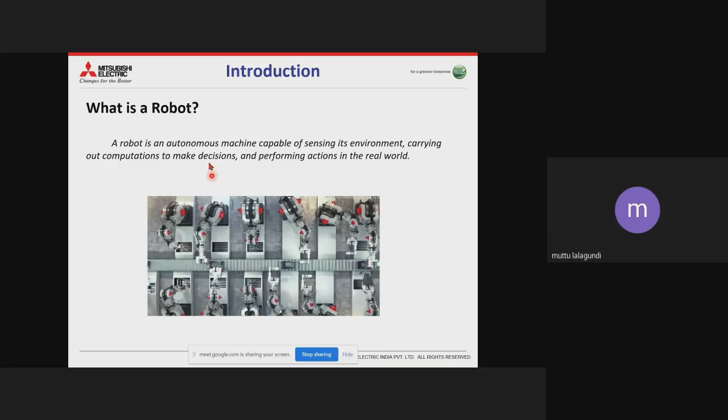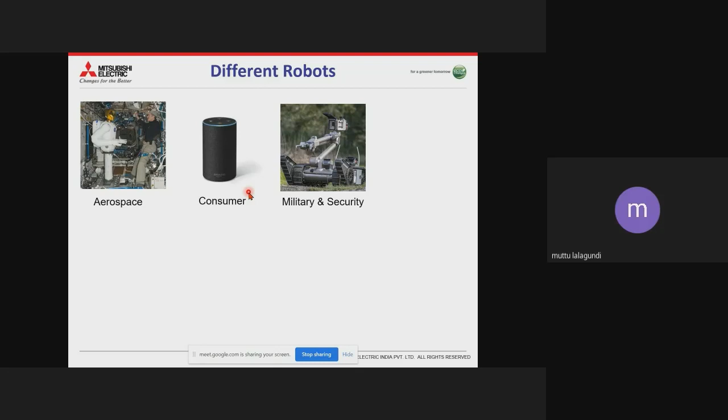Now, different robots - here we will understand. Some robots are used in aerospace, which are compatible for such kind of environments, so aerospace robots. Then consumer type robots. Then military and security purpose robots, where humans cannot go sometimes. Then drones, also a kind of robot. Then research applications also use robots - such robots have different features and specifications.

Then exoskeletons, which can work with a human - for example you can look at the picture here. So such kind of robots also exist. Then humanoids, a kind of human-like robot. They are used in many industries and household applications like hospitality and other things in hotels, so most of the cases they are used with the humans - humanoids.

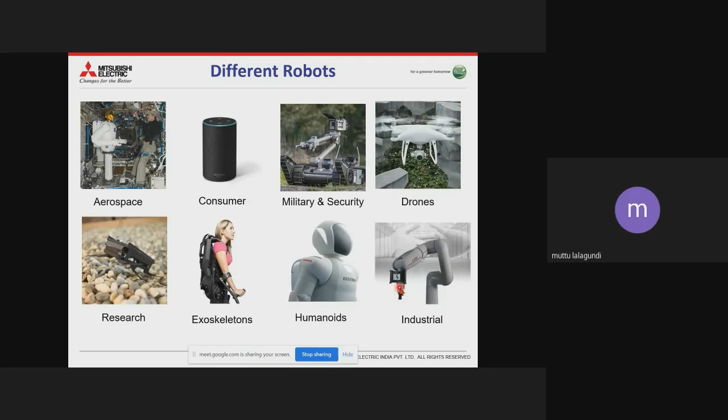Then comes robots used in the industry. There are a lot of applications, a lot of types, where these kinds of industrial robots are used for different kinds of works in the industry.

There are majorly four types of industrial robots. If you categorize industrial robots, there are articulated robots - in that there is vertical and horizontal. Horizontal robots are generally called SCARA robots. Then the second one is Cartesian robots - these robots use XYZ Cartesian forms, or Cartesian joints, for the linear movement. So these are called Cartesian robots.

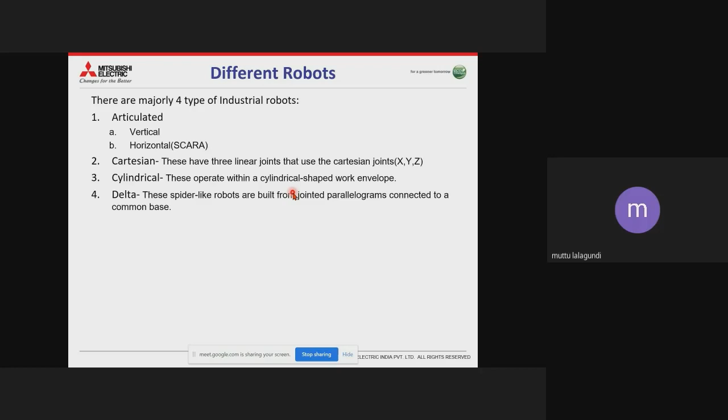Then there are cylindrical type robots also, which operate within a cylindrical shape to work. Then Delta - Delta is a kind of robot which is built from jointed parallelograms connected to a common base.

These are major types, and you can see the same robots here. So this is a Cartesian robot. It uses X movement like this, and Y movement like this, and up and down, just Z format - X, Y, Z. So linear movement totally.

Then articulated robot, there is a vertical and horizontal also, which is installed on a horizontal base here. So this is, whereas the horizontal robot will move around a vertical stand. So this is a vertical base, you can say, and around this it will move like this. So that is horizontal, also called a SCARA robot.

Horizontal robots are also called SCARA robots. Then this is cylindrical robot. It is provided with a cylindrical space for the movement. So here is a kind of arm, left and right it will move, and it is also having a feature of moving up and down also. So this is cylindrical.

Here this is a Delta robot. It looks like a spider. Parallelograms are used for this purpose. So this is the hand or the tool, you can say. A lot of different applications are done using delta robots. In most cases in industry, these types of robots are used: vertical robots, horizontal, and delta. Most cases they are used.

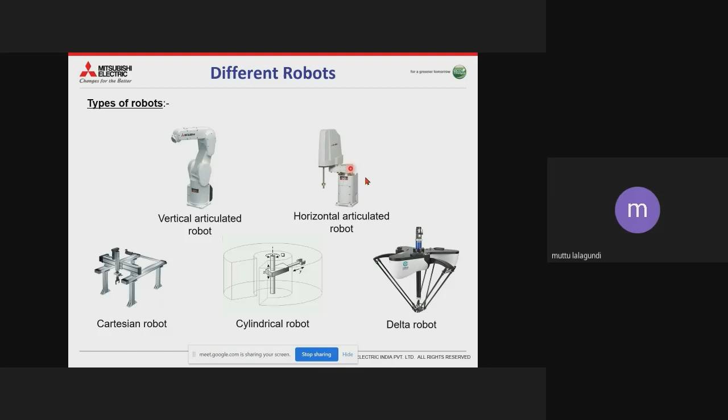Then why do we have to go for robots? What are the advantages of industrial robots? You can see there is a hazardous space sometimes where humans cannot enter for working there. So in such locations, robots can easily work. So for that, we use robots in hazardous work environments.

Repetitive work cycle means a human can make some error. Every time if you ask some person to take some part and keep it in another place, consistency or repetition will not be stable all the time. But whereas the robot, if you use a repetitive work cycle, every time it will do the same job you are asking it to do, whatever the program is. Then consistency and accuracy - definitely we will get accuracy, whatever job you are telling, the same job it will do, with precision and consistent performance.

Difficult handling tasks for humans, maybe in hazardous areas like high temperature areas, or chemical areas, sometimes it is very difficult to handle the job or application for humans. In multi-shift operations, a human can work maximum one shift, maybe 8 hours. But whereas robots you can use 24 by 7, with proper maintenance. Maintenance is required, but in multiple shift operations, more than what a human can work, they will work.

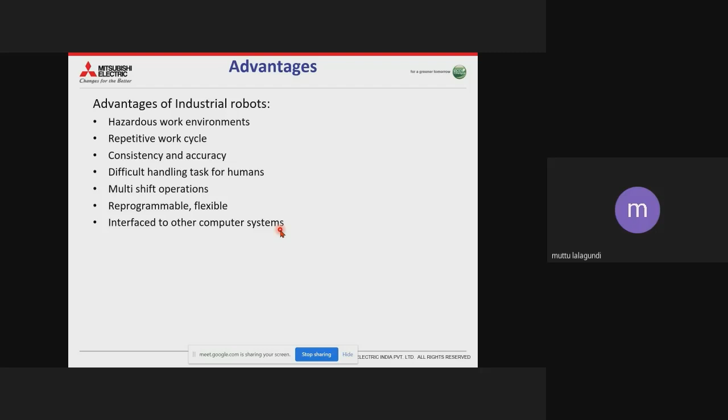An application, this is an important part - why we have to use robots in industry, or requirements, you can say. So in industry, for example automobile and machine shops, if you take, there are many applications. Deburring and polishing applications, you can say. So programming is always the same for the robot, only the tool used makes the application dependent.

Here there is a deburring or polishing tool used. And here it is a tool used, and it is taking the job here, and using it for the polishing purpose here. Such applications also we can do. Then appearance inspection - let us say size or dimension is important in our applications.

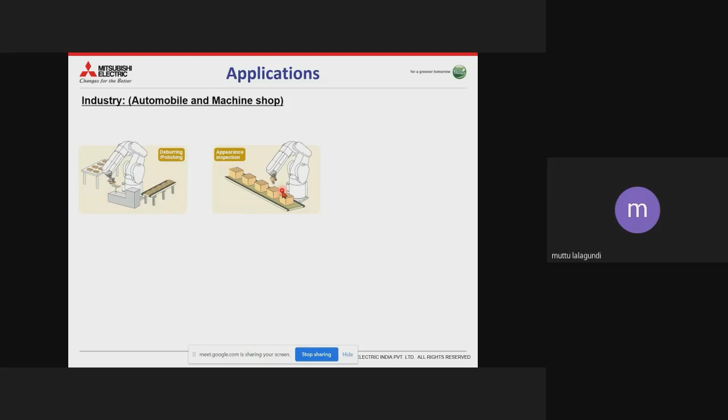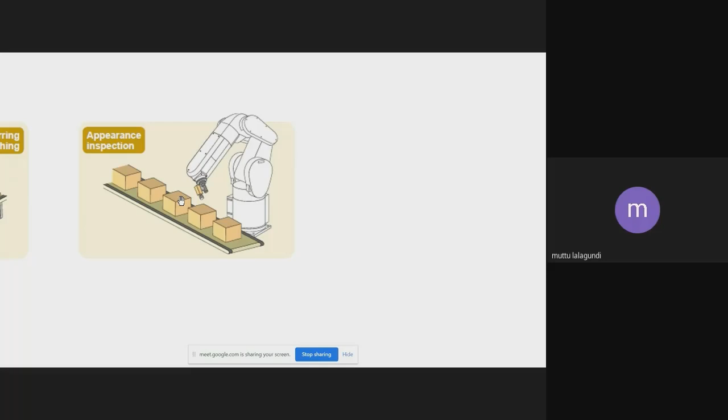For testing dimensions and weight, and other purposes, we use a camera. The camera is connected and it inspects all the devices, for example in this application. Such applications can also be used for appearance inspection purposes.

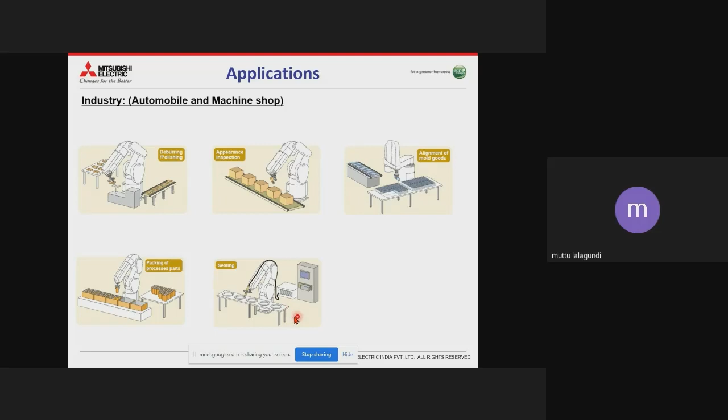There is a next option for food and beverage industries, where there are sealing applications of different types used in the industries. Sealing is also a common process - you can seal any of your goods using some sealing material, and the robot will help seal that part.

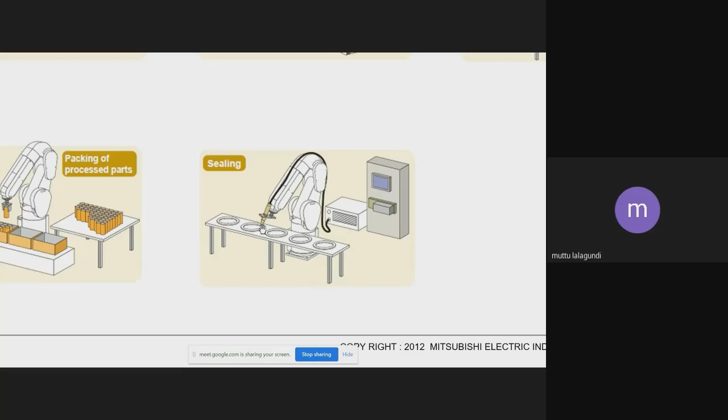Other part of sealing is applying sealants - a liquid. There is a sealant or liquid dispenser connected to the robot, which will equally distribute the liquid, and any part can be installed and sealed here. This is used in food packaging industries as well - we can use sealing applications with robots.

Then assembly of automobile components - you can see an automobile component part of an engine, which is assembled by the robots. It is programmed so that it will pick some parts available around the robot and assemble them, giving us accuracy and fast operations with the required precision.

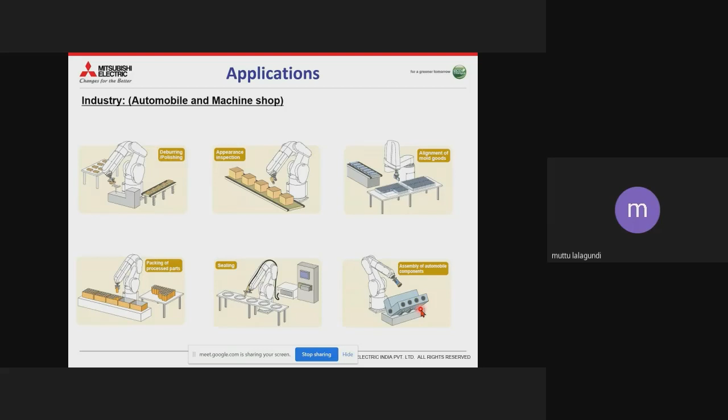Then in the electrical and electronic industry, robot applications here. Again, whatever the electronic or electrical parts are, they will be inspected for appearance by looking, using 2D or 3D cameras with the robots for inspection of these parts.

Then there are applications where screw tightening, or screw fastening, is required. In such applications also the robots are used.

Then other applications like soldering and welding - such applications are also used for any kind of electronic goods. Maybe soldering is required, in which case the robot will handle such applications. It needs to be programmed in that way.

Laser marking also - whenever you want to do some cutting operations, laser marking or cutting is required. A laser tool is connected to the robot arm, and it will mark using this tool while the robot helps carry the tool, programmed for such applications.

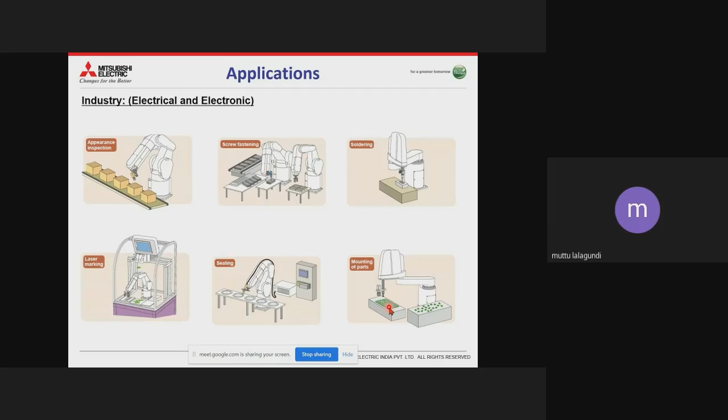Then if you take food products applications, there is packaging, as mentioned in the previous slide also. Packaging is a very important industry type. Let me explain why - daily based goods, from morning to evening, include food products or packaging liquids we use, and water bottles. All these products have to be packed, and precision is also required.

If you take a water bottle, and test 100 water bottles of 1 liter, you will not get any difference - the content will be 1 liter. How is this achieved? Only with robots, because whatever liquid you want to pour into the bottle, that much precise quantity it will pour and pack. The bottle is then kept in the box, making the packing application.

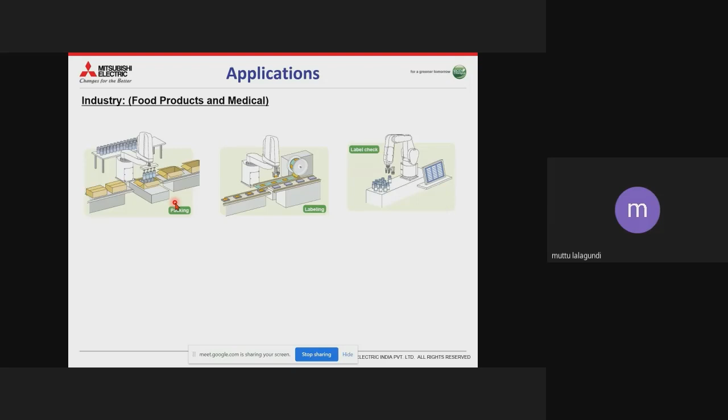And label check also, whether labeling is done or not. It's again an inspection application here. So again, with the help of a camera, it will do the label check. Loading of parts to a medicine analyzer. Okay, so it's a kind of medical industry here, a medical type of machine, you can say. So it is loading and unloading the parts after analysis by the machine. Such applications.

Then sorting applications also. So I'll show you some videos on this also. So based on the color, based on the dimension. Okay, so if you mixed any of your goods and parts, it will sort them depending on the size, dimensions. Okay, with the help of again a camera here.

Loading unloading process for filler applications. So filler application, it's a kind of liquid filling, or as I mentioned, kind of water filling also, right? So it's the same application again. Only here the part will change. That is a gripper, you can call it, or actuator, you can call it. So that part will change, but robot applications and programming are almost similar in loading and unloading or the filling process.

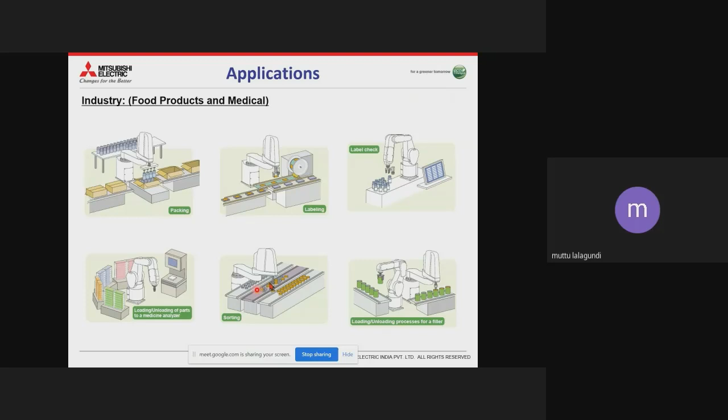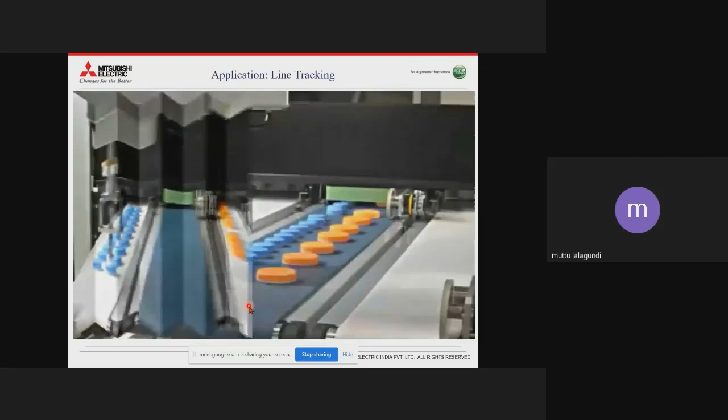Okay, this is just one example for the sorting, as I mentioned. Just have a look. There is no audio for this. Okay, so what it is doing, it is sorting the parts here, and exactly it is keeping them in desired positions. Okay, so if you mix the different parts, it is categorizing or sorting the different parts here.

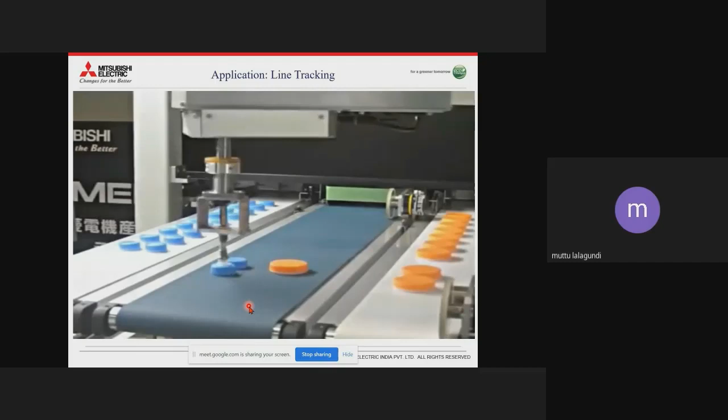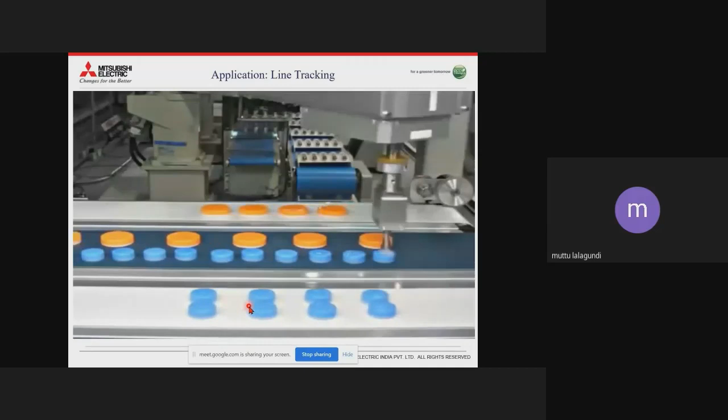Okay, this is called a line tracking application. I hope the video is visible. Okay, maybe some lagging if it is there in the network. So such applications are done in the industry in most of the applications. This is a kind of pick and place application where line tracking is required as well.

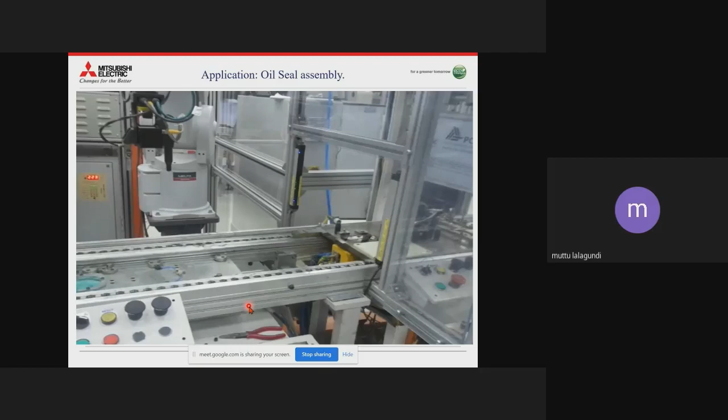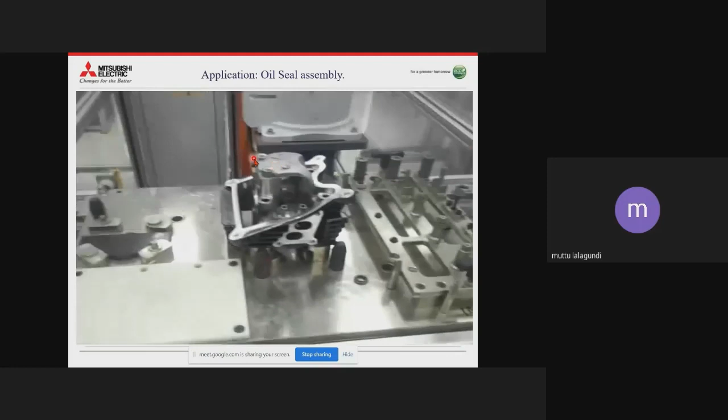Then there is an application, oil seal assembly here. Okay, so there is a mechanical or assembly part here. So it is keeping some oil seals here. Okay, so assembly it is doing. You can have a look. So this is a part here, right? And there is an oil seal applied here. So first it will apply the sealant. Okay, and screw application it is also doing. You can see screw tightening it is also doing.

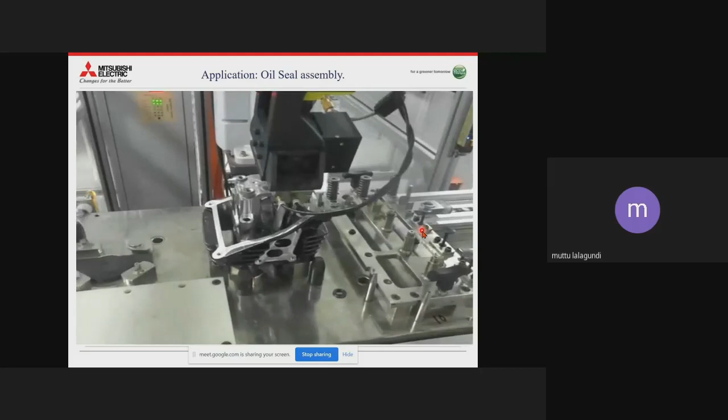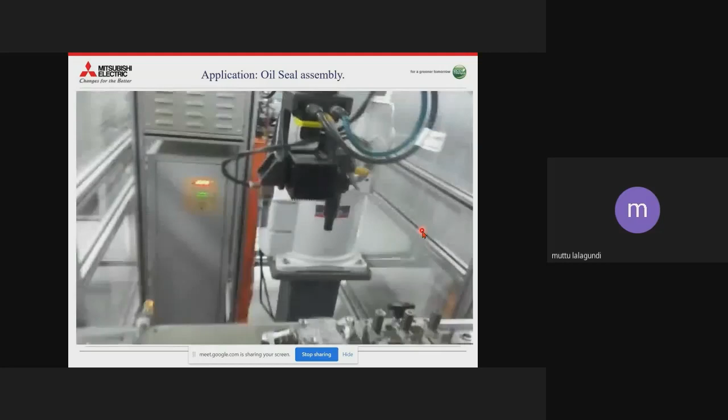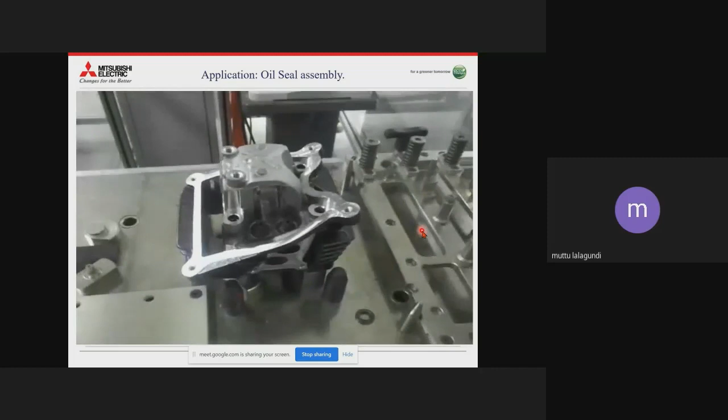So this is a vertical robot. It's doing an oil seal assembly here, right?

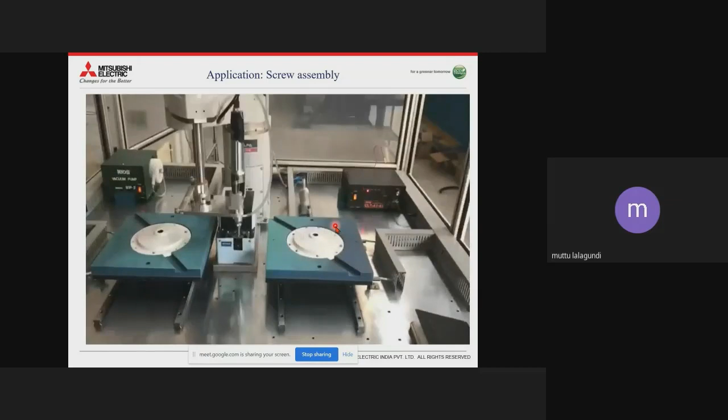So these are the applications. Then we have to understand how exactly in industry the robots are used. Not only a single robot is directly applied; it is used with all other factory automation products and components, you can say. So here this is one configuration, or one structure, or you can say a machine assembly test.

Okay, so why is HMI used in industry? Every time we want to give some inputs to the PLC or to the robots or to other devices, we can input through the HMI. So if you want to correlate this, it is exactly like ATM machines, where you give inputs like the amount required, password and other things. Such inputs we are giving to the industrial PLC here using HMI.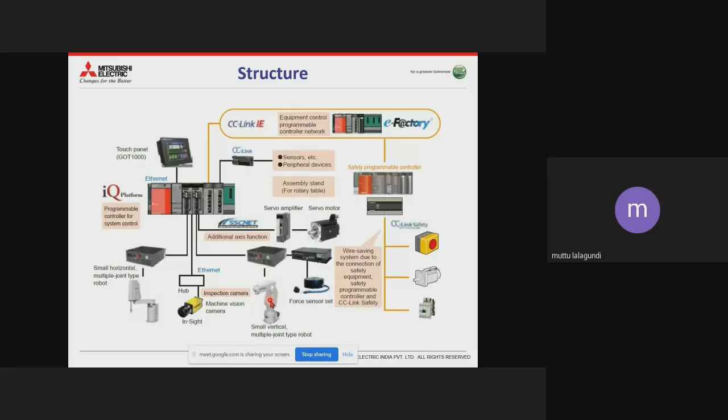And of course servos are also used in most of the cases for these applications. And inside the robot also there is a servo system. So this is the complete structure, an example of robots with other factory automation products.

Then safety is also important here. So one more point is also there. Why is safety important? Safety not only for the robot; safety in industry is very important, because there are a lot of people working individually towards their job there. But if any machine, robot or application is not working properly, not doing its job correctly, then that will lead to some accidents.

If it is not following the proper programmed path, that creates hazards or errors, and then it will lead to an accident. That's why safety is important. From the equipment point of view, it will prevent accidents and save the cost of the equipment, the machine or the robot. And it will save the operators and other humans working there. So accidents should be avoided, and for that we should use safety.

So the operator operation area and robot operation area are separated from each other with a monitoring plane for safety. In robots we can set some safety planes, and we can use safety curtains and safety devices to separate the robot operation area from the operator working with the robot. So the operator and the robot access the shared operation area alternately, allowing for cooperative or collaborative operation.

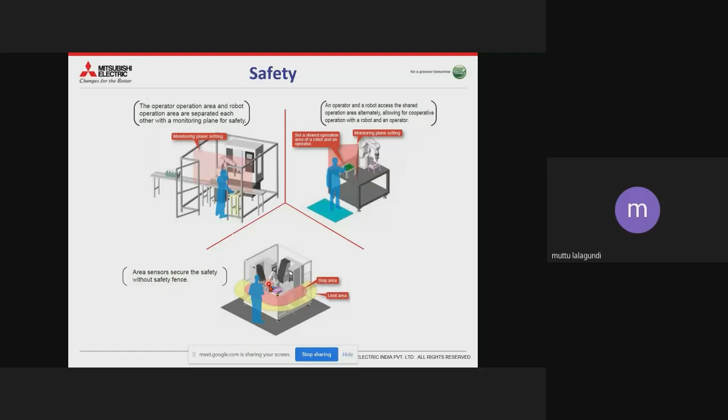Whatever hazards, errors or accidents happen, they happen whenever a human is involved in some actions with the robot. That may be during robot programming or during installation. Or if the power supply and other things are supplied uncontrollably, only in that case can the robot cause accidents. So we should follow safety. For safety, I have added a few more pieces of information; I'll give them in the next slides.

So this is the general information we discussed about robots and robotics. Now there are Mitsubishi robots, their types and how we categorize them. That we also need to understand. There are different models available, like RV-2FR, 2FRL, RV-7, 13 and 20.

If you read its nomenclature or model name, you will understand why it is written like this. I'm going to tell you for what purpose the 2 is written. The 2 is for its payload. Payload is nothing but the amount of weight the robot can carry. So it is 3 kg here, 4 means 4 kg, 7 kg, 13 kg and 20 kg likewise. So this is the payload, or maximum load capacity.

Then there is one more term, that is maximum radius. What is maximum radius? This is the robot base. When you stretch the robot completely, like this, that is the maximum reach where the robot can touch or move. That is standard for each model. Whatever model we take depends on our product selection. In that also there is a standard model.

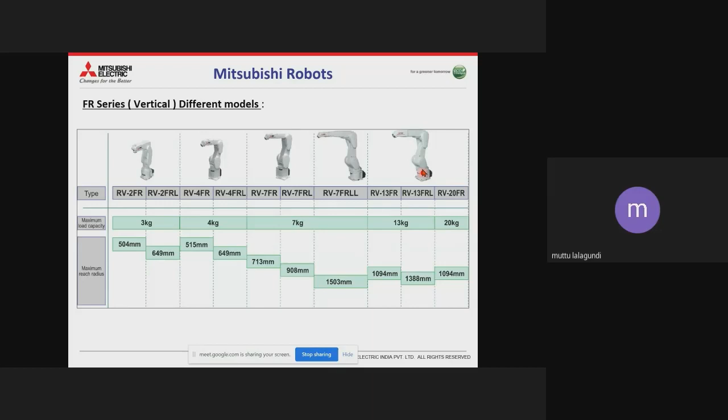For example, 2FR. L indicates a longer arm. Standard is 504 millimeters, and if you take 2FRL, for example, just for information, it is 649 millimeters. In the 7 kg range we also have different models, in 4 kg and 13 also, likewise. These are vertical type robots. You can see the structure. If you look at the robot, it is a vertical type robot.

Yeah, this is, if you take RV-4FR, RV-4FRL, and with that there is a complete name also. For example, if this is the code, how we can understand or how we have to read it. So RV here indicates vertical. It indicates vertical multi-joint arm. So the robot is vertical type.

It indicates here. The next part is the payload. Payload means, I already mentioned, 4 kg, 7 kg. The number mentioned indicates its maximum load carrying capacity. The next is here: FR is a series. So there is F series and FR series in Mitsubishi.

And J here indicates axis configuration. In the standard case, J will not be there. Standard means it has 6 joints or 6 axes in the robot. For easy understanding, vertical means always 6 axes. But there are some robots, 5-axis type robots, also available. So if you want to have 5 axes, it is indicated with J.

Then L. L indicates the arm length here. There is a standard arm length; in that case, L is not there. If L is mentioned, or sometimes double L, it is a longer arm than the standard. Standard means blank will be there. If you want a longer arm, L or double L is there.

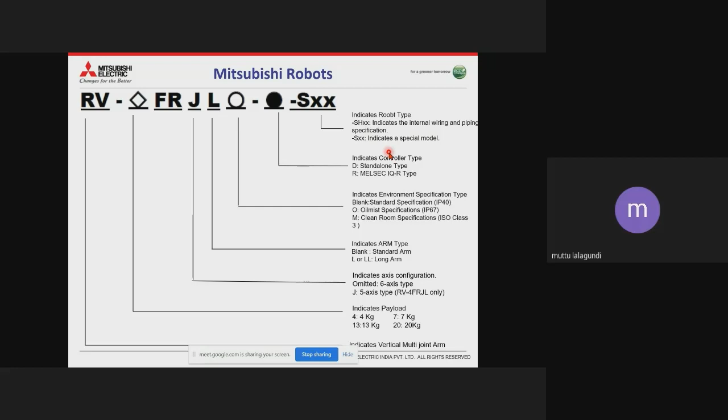Then other specifications. Internally the robot has some wiring and piping also, because if you want to use a gripper with pneumatic applications, with air, then the piping specification depends on how you want to use it: externally or internally, whether the user wants to create it or wants it from the manufacturer. So those are special indications, and other special models are also available. That is indicated here in the last part.

If SH01 is written, this is the meaning, and likewise up to SH05. What it indicates is hand input. Hand input means some sensors are used, proximity switches, to understand whether there is material or not in a gripper. So it's the wiring and piping, you can say its dimensions.

In some cases piping is not available. With those specifications we can get these wiring and piping types, its condition. So that is also selectable. We can do that while purchasing the robot or at model selection time.

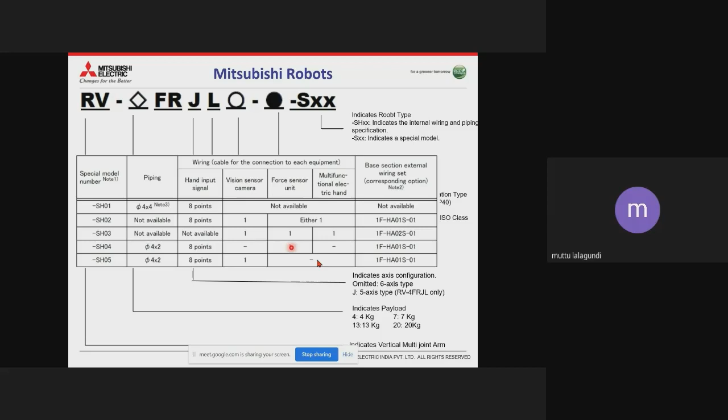Yeah, I mentioned the controller again, right? So this is the controller model. Every product, the robot arm, has some nomenclature, and the robot controller also has some nomenclature. You can see this is the robot arm, and this is the controller used with it.

At the end, D is mentioned. For your simple information, if D is mentioned last, it means it is a standalone type robot arm, and with that the CR800-D standalone controller is used. D means it has to match: standalone arm and standalone controller. There are other specifications also; when you go in depth, you'll understand.

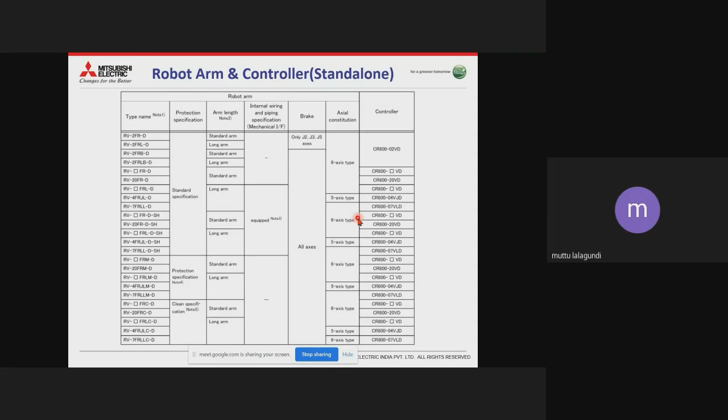And if R is mentioned, the controller type is Melsec iQ-R. What is Melsec iQ-R? For your information, Melsec iQ-R is a PLC type in Mitsubishi. So with the robot controller, a PLC is also used. In that case, R is mentioned at the end for the arm, and for the controller also R is mentioned at the end. So R means it is Melsec iQ-R type.

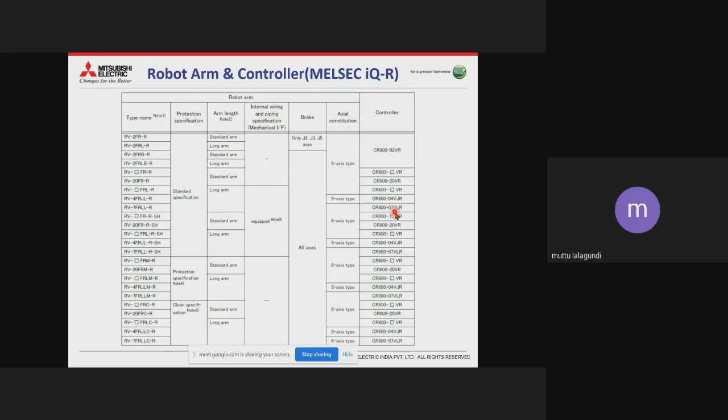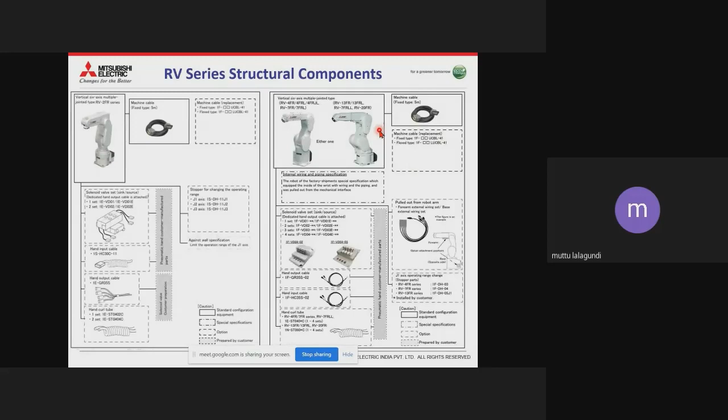Okay, then again the basic parts, we have to understand the anatomy also. So why there are vertical type robots, why there are horizontal type robots, and how exactly we call horizontal, vertical, delta. Okay, so it is based on its anatomy and its structure, and the number of axes used, as I mentioned. So in the picture, what you can see, it is a vertical robot first thing, and that is indicated using RV.

And in general, all these vertical robots are having 6 axes or 6 joints, you can call it. So not only Mitsubishi, it is common information. Vertical robot means 6 axes. So where are these 6 axes? This is joint one or axis one, you can call it. So the whole body will move like this on this vertical pedestal here. This is joint 1, and there is a joint 2 or axis 2 here. It will move up and down.

Same is here, axis 3. It will also move up and down. And this is J4 or joint 4 or axis 4. So this will move clockwise, anti-clockwise like this. And up and down, joint 5 again here. And there is joint 6 where your gripper or any pneumatic device or moving parts we should connect here. It is the 6th joint. It will move clockwise, anti-clockwise, right?

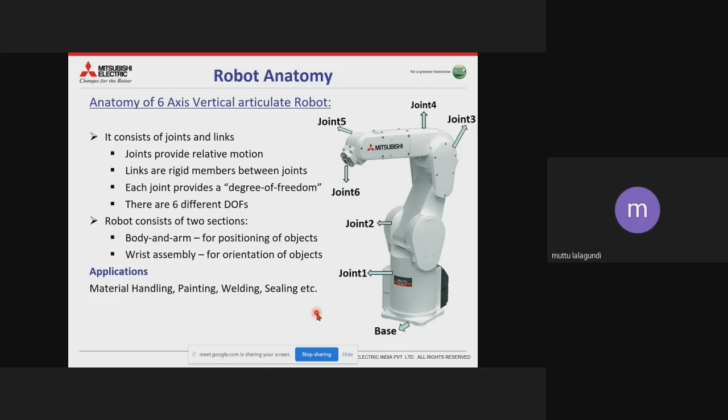So these robots are generally used in applications like material handling and painting. We have seen a lot of applications in the beginning, right? So applications like painting, welding, sealing, these are used. And robot anatomy, the 6 axis or 6 joint robot will move horizontally like this. So if you stretch this completely, and backward also, and vertically also. So the maximum movement a robot can do is called the workspace. This is the workspace.

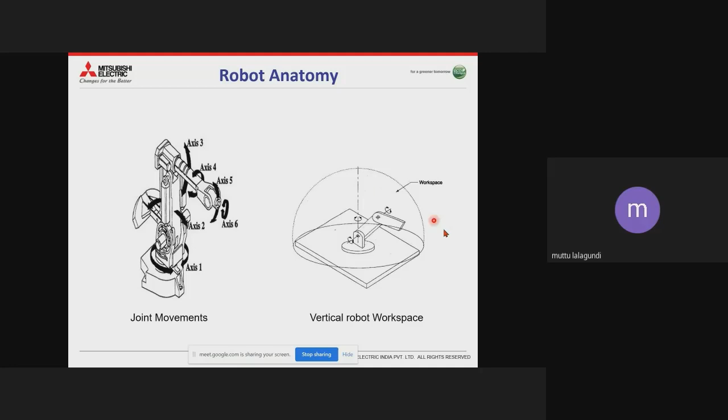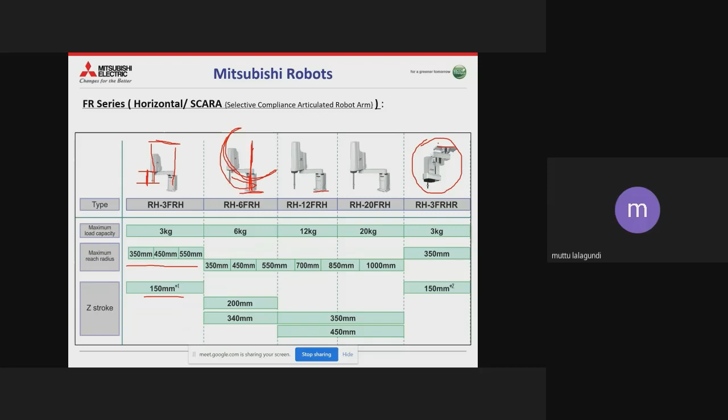Generally the SCARA robot or horizontal robot has 4 axes only. Where are the 4 axes? This is one joint; using this joint it will move clockwise, anti-clockwise. The next part here will also move clockwise, anti-clockwise. This is joint 1, this is joint 2, and joint 3 is this spindle. The spindle will move up and down, and it will also rotate clockwise, anti-clockwise. This is joint 4. So generally SCARA robots have 4 axes or 4 joints.

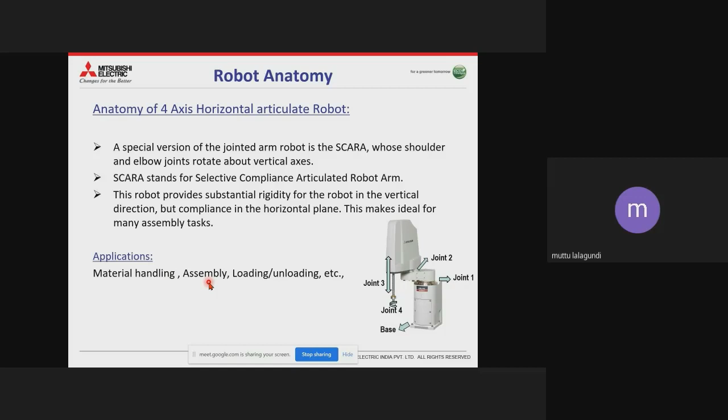In most cases it is used in material handling, assembly, loading, unloading applications. In this robot anatomy, you can see the workspace, how much it will rotate, and up and down only this spindle will move, not like vertical. That is why in 3D space, for any kind of jobs, vertical type robots are more convenient than horizontal. But pick and place applications, like picking from here and keeping here, are very compatible with SCARA or 4-axis robots.

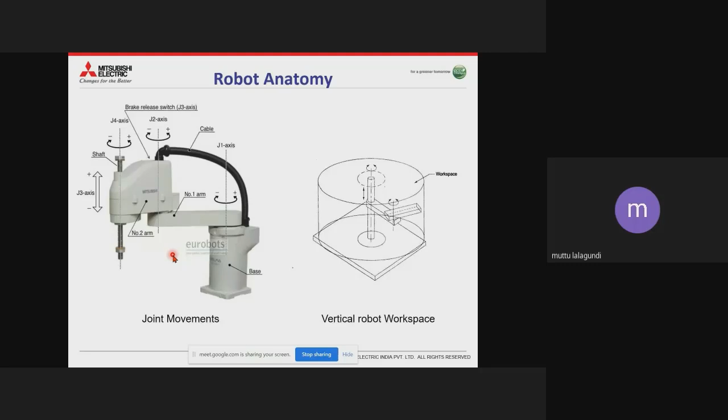Next, robots generally need to be taught. What is teaching? You want the robot to go some place, so how do we move it? There is a teaching box; it can move in Cartesian format, XYZ movement, where the whole robot moves in that direction, or otherwise each joint moves. This operation is called jogging. Using jogging with the teach pendant, we can save the positions where you want the robot to go.

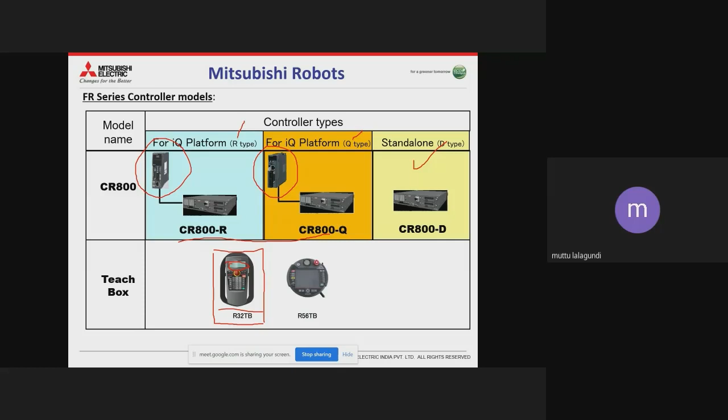So before programming, we have to store the positions. We have to move the robot using this teaching pendant. This is also teaching pendant only, so what is the difference? This one has an LCD panel with some keys over here.

Whereas this one is a touch screen. It is a higher end teaching pendant, having some buttons also. These are used for the robot jogging operation, and it has emergency stop. Emergency means, as the word indicates, we can stop the robot immediately. So for operating the robot, a teaching pendant or teaching box is used.

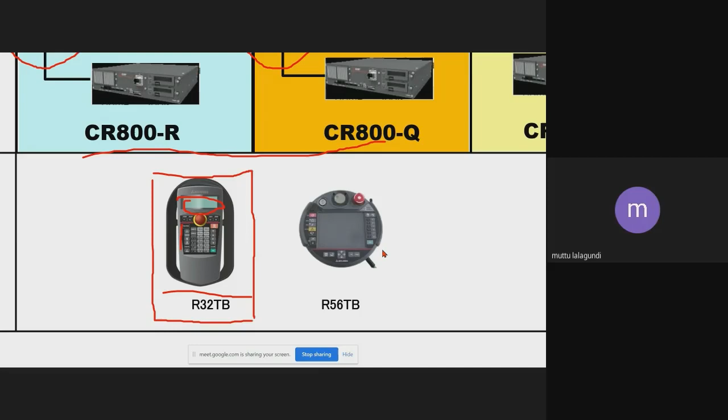Now in general about the robot, how it works, how it moves, and what exactly they use - that movement is governed by the coordinate system inside, the robot coordinate system. As you already have information on that, the same coordinate systems the robot also uses here.

So a coordinate system defines a plane or a space by axes from a fixed point called the origin. This term 'origin' has a bigger meaning. Origin is the home position, for example - it's not exactly home. If you operate the robot, you will understand the difference between homing position and origin. Origin is set when you get the new robot to your shop floor.

It is not set with its origin, meaning what are its limits, to what degree each joint can move. So that setting we have to do - from what is its start position or origin position, from where to where it has to move. So that is called origin.

It has some different methods also. Origin setting is a method we have to do for new robots, and whenever it loses its origin settings also. In what conditions does this generally happen? It has some batteries, so if the battery voltage level goes down beyond the permissible level, in that case we have to do origin settings.

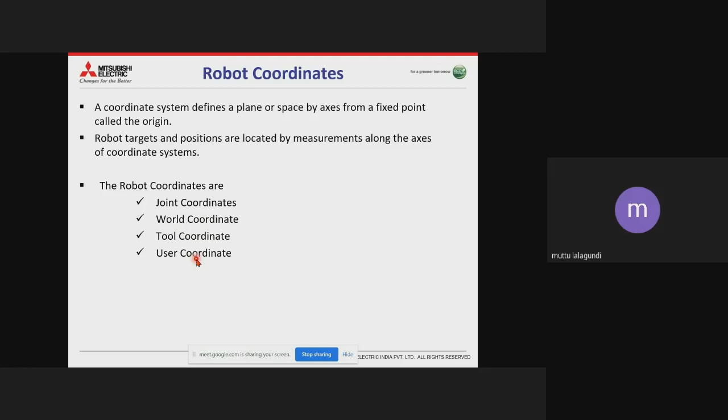Then user coordinate - the user or operator can set any direction. If I want to change X to Y or Y to Z, I can make that change. So that is user defined coordinates.

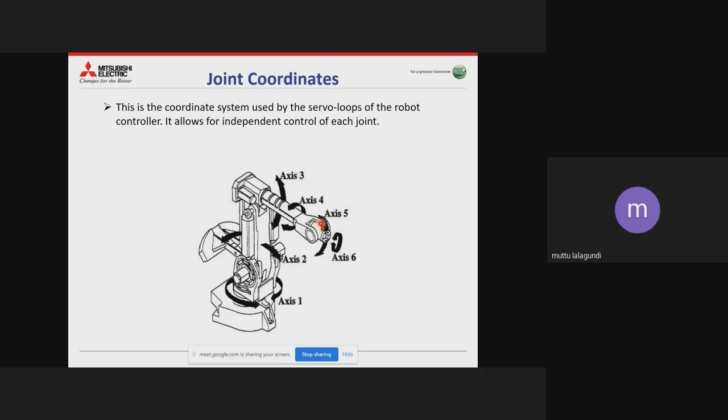This is joint coordinates. As I mentioned, independently there are 6 axes or joints. Independently they move irrespective of other axes' movement or position. This is world coordinate system.

So what is that? It uses Cartesian coordinates x, y, z. For example, this is x, this is y, and this is z. So what happens if you want to move in the x plus direction? The complete robot will move in this direction. X minus, this direction. Y, this way, the complete robot will move. In this one, J1, J2, whatever axes need to be used, all these axes or joints together make a movement.

That is world coordinates. And world coordinate means this is the base - from the base it will always take the reference of x, y, and z.

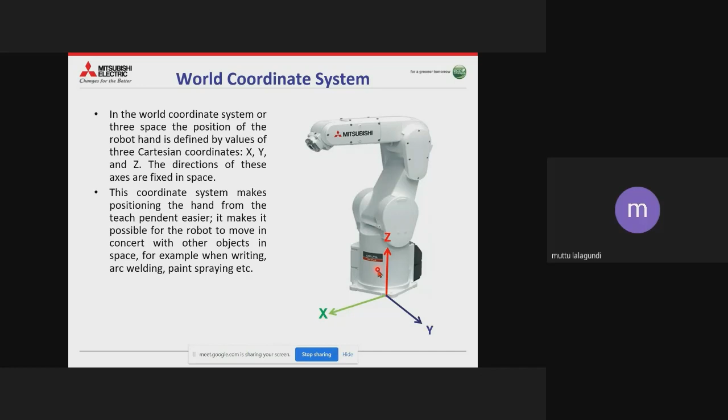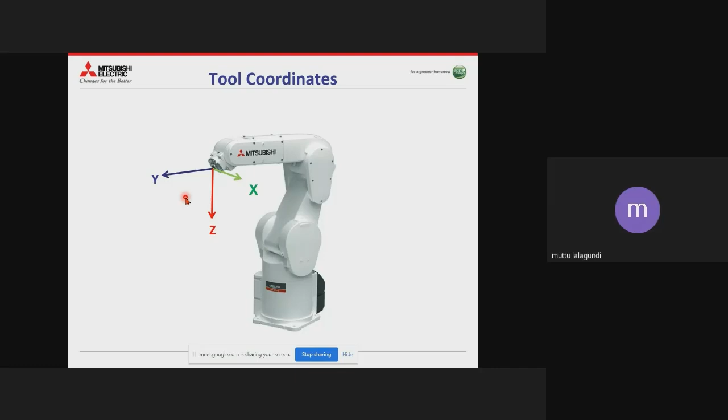Whereas in tool coordinate system, this tool coordinate again uses x, y, z only, but the reference is not from its base, the robot base. It's from the tool. Tool is any gripper, as I mentioned, any gripper or pick and place tool used to hold the object. This tool is connected on the J6 axis. So with respect to this tool, its x, y, z direction, it will make the movement. So in reference of the tool only it will move. This is tool coordinate. It also uses x, y, z.

So user coordinates, as I mentioned, this is generally set. If I want to make it x or y, I can make it. That's why it's called user defined coordinates. So these are the coordinate systems or the moving methods used in the robot. This is in general, not only Mitsubishi. Every system uses this.

Then there are some robot general terminologies we need to understand. Reach is, as I mentioned, there is an arm length also, L and double L, we heard that, right? Reach means the maximum horizontal distance from the center of the robot base to the end of its wrist. End of the wrist means exactly from here, this is the center. From this center, if you stretch the robot like this, till this end.

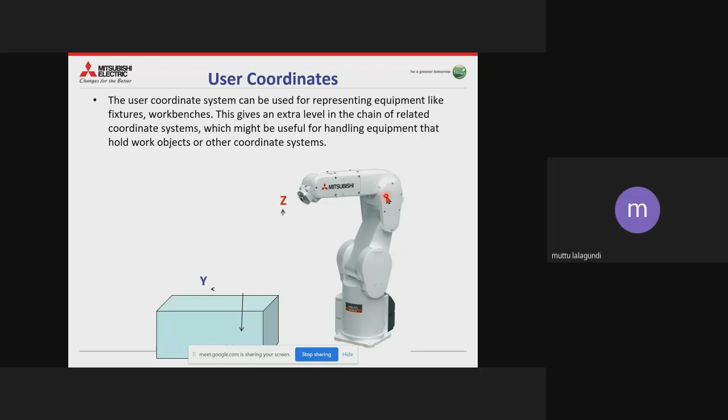So from this end to this end, it is called the reach. Then maximum speed, as you know, it is not having a fixed speed, because there are some servo motors as I mentioned here. There is a heavy motor, a small motor, and even smaller, and they have different speeds. So your robot's maximum speed is a cumulative speed, including all the other axis or joint speeds.

And at full speed, the maximum speed is a theoretical value which doesn't consider loading conditions. This is ideal. If you consider the load, the speed will reduce definitely, because it should maintain accuracy also. It has to properly pick the part and place it at the desired position, that should happen properly. So at the speed where you are able to get accuracy, that maximum speed is called maximum speed.

It's a cumulative speed. Payload is simply, as I mentioned, 4 means that the robot is capable of carrying 4 kg load. That includes the ideal 4 kg. But if you connect any tool or gripper, any other device to the robot, and also your workpiece, including that also it is 4 kg, for example. That will be the maximum payload.

Accuracy, as I already mentioned, while carrying maximum payload and while having maximum speed, it should produce proper accuracy, meaning correct position. Accuracy means the robot reaches the correct position where you want it to go, with high speed and carrying its maximum load. This is called accuracy. And the same accuracy every cycle is called repeatability.

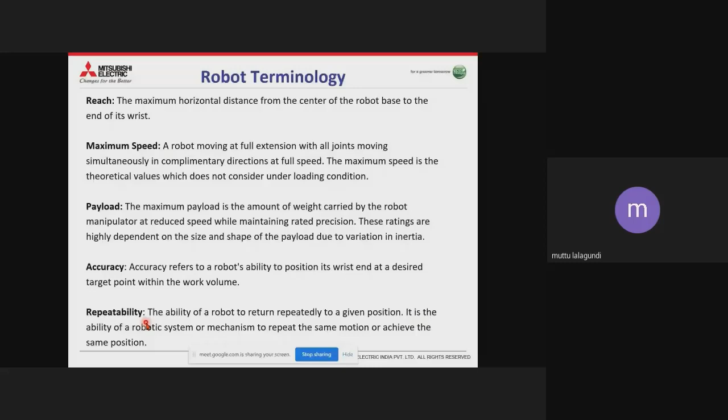Then there is resolution also. For your understanding, let us say you want to move a robot from one position to another. What is the smallest distance it can move? Let us say 1 millimeter or 5 millimeters, only that much it is able to move. That is the resolution, the smallest position or motion or movement it can do. That is called resolution.

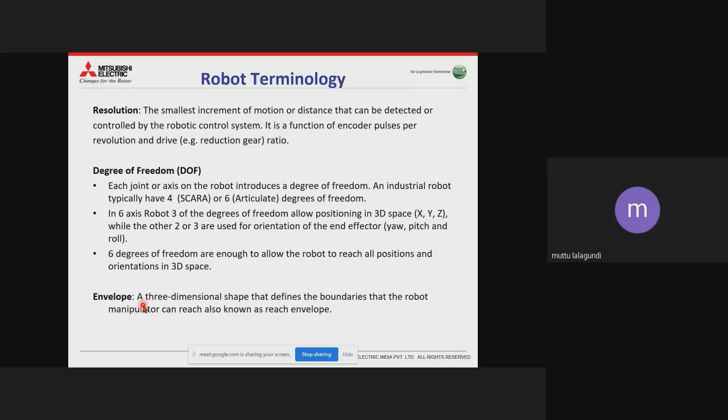So we already understood degree of freedom, each joint independently moving is degree of freedom. Envelope means whatever the robot's working area is, that is called envelope. That is a three-dimensional shape or area.

Then, while understanding a lot of applications, we mentioned about vision cameras. Cameras are very important if you want to achieve accuracy and precision, and if you want to achieve maximum speed with robot applications, cameras are most of the times used. In general, there are 2D cameras and 3D cameras. So why is it used? Backend image processing hardware and software - the camera at the front end captures images from the environment or from a focused object and then sends them to a processing system. Depending on the design or need of the MVS, the captured images are either stored or processed accordingly.

So it will take the image and send it to a robot controller or a PLC separately. It will process there and give the command to the robot on what it has to do.

There are 2D cameras and 3D cameras. A 2D vision system acquires the target object image effectively as a flat two-dimensional plan view, for example like this. So it uses X and Y. Z is not there, as it is 2D only.

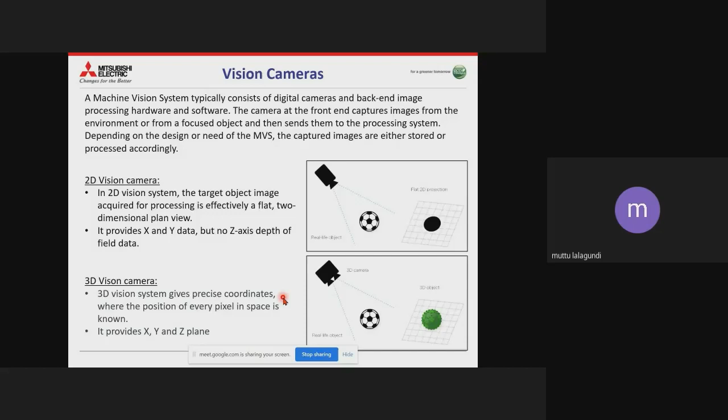And with that, if you want to check in one tablet or capsule that there are, say, 10 tablets, if it is produced properly, whether the weight, quantity or number is correct in that capsule, you can use a camera in that case. It will immediately scan whatever capsules are present and give the command for the next processing step. If it is okay, it passes to the next step; if not, it will discard that product. So cameras are applied with the robot like that.

There are different vision cameras also. If you take the 2D sensor, these are also called sensors, in easy terms used in industry. So these are called vision sensors. VS80, 70 and 20, and likewise models are there, and different models can be used based on our requirement.

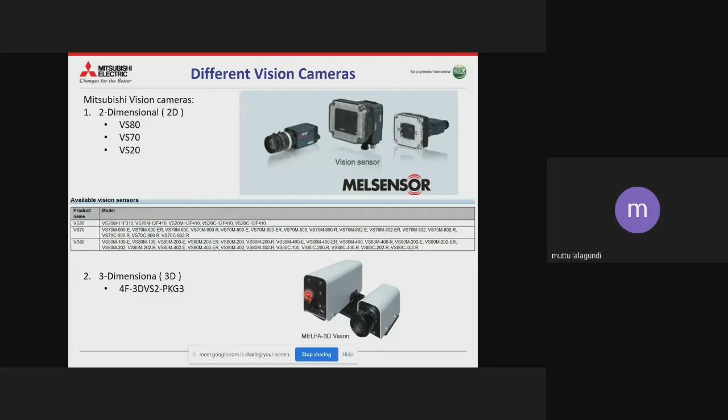And for 3D dimensions, if you want to get them, we can use 3D cameras, such as 4F-3DVS2-PKG3. Such models are available for 3D operations, and we can use these cameras with the robot.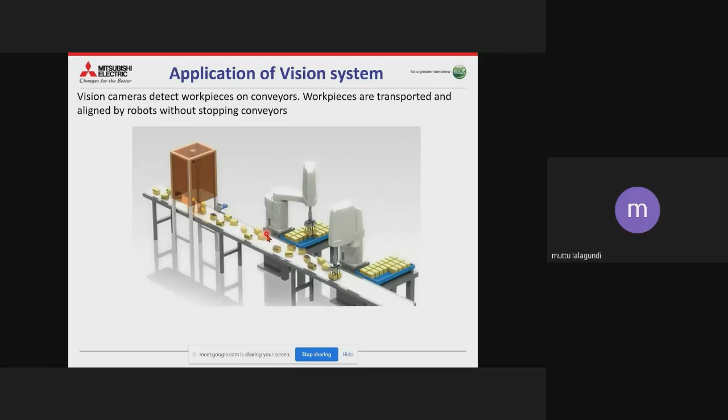Now the application of vision system, as I mentioned. For example, you can see in this application, vision cameras detect the workpiece on the conveyor. The conveyor is going on and workpieces are dropped here. The vision sensor or camera finds these workpieces or parts, which are transported and aligned by robots without stopping the conveyor. So it will not stop to pick this workpiece; while going, the robot will come and pick it. How does the robot understand there is a part? With the help of the camera, in this case.

As I mentioned, robot safety is also important. We have seen some safety points in an earlier slide also. Safety is very important in all industrial settings, whenever you work in industry. That is very important.

Most accidents with robots occur during programming, maintenance - whenever we do annual or monthly maintenance for the robot - during repairing work, or during setup and testing, all of which involve human interaction. Whenever there is human involvement, then only accidents occur, in these conditions.

So what are the causes for that? One is lack of employee training. If you are not trained, if you are not aware about how the robot will work or its current condition, and that human goes to do any operations with the robot, there is a chance of accidents. Then improper use of safety guards - that is why safety is very important. There are always safety guards, safety limits, safety mats, everything. We should apply safety measures first, and then we can operate the robot.

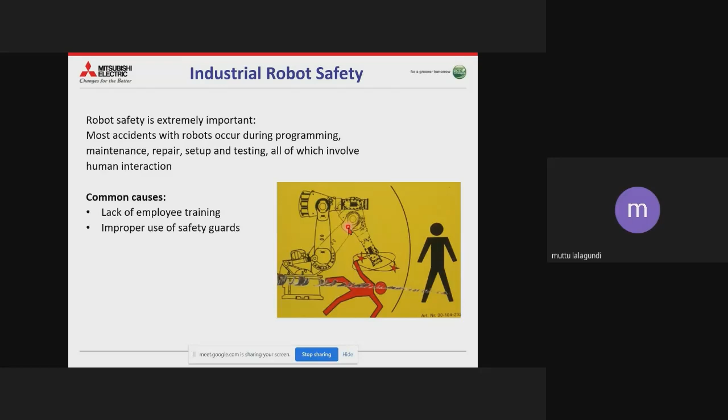Okay, so nowadays in industries, such safety methods are used. So what are those? There are safety guards also. Okay, so this safety method is like this: here a human will not go, so only the robot will work. And you can see the point of operation safeguarding, so where the robot is working and where the human is working.

Okay, so this is a door, for example. When you close it, then only it will work. Or there are IR sensors here. So when these signals are crossed, then the robot will stop. And there are end effectors also used for the robots, and some safety enclosed areas are also used here. So only whenever it is closed will the robot work.

So robot axis position verification. Okay, its position also we can change. Sometimes if it is malfunctioning, then we can verify its position and we can do the next operations. So safety is important with robots and other industrial machines.

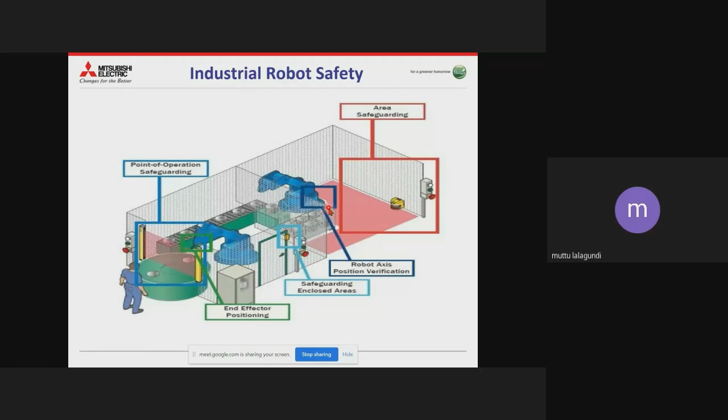Then, so this is all the information we got, and now how we have to do the programming for that, and what is the software we have to use. So you can see in general all those robots have different software. Okay, so likewise in Mitsubishi, we have RT Toolbox 3.

So this software is used to read the robot positions, to create sequences, motions, and finally to create the program, and that program can be loaded. Okay, and you can run the robot. So whatever the positions are, one by one, it will move there and do the required operations there. That is created by using RT Toolbox 3.

So it is easier. We can also examine its layouts. It means sometimes if it is making collisions with objects or any other robots, that we can check. So 3D view is also available in this software, and this software is available in 3 versions: RT Toolbox 3 Mini, RT Toolbox 3 and RT Toolbox 3 Pro.

So in RT Toolbox 3 Pro, you will get all those facilities like integration with SolidWorks. So if you are creating different 2D, 3D drawings and other details, and you are making that work in SolidWorks, directly we can get or integrate that work into RT Toolbox 3. Okay, path generation from the CAD also.

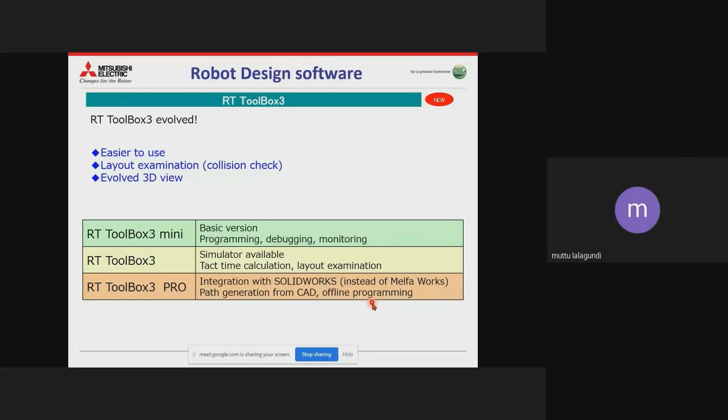Okay, this software RT Toolbox 3 looks like this. So there is a 3D vision also, right? This is the operating panel. Using this we can move the robot also. So there are modes again. You can operate the robot in online mode or in simulation mode. Online means your actual robot will work. Simulation means whatever the programs in the software, whatever robot model you selected, it will move here.

So okay, that is understood. On the right hand side corner there is a mode indication: simulation, online or offline. And this is a workspace. Here you will find different robot options, like robot model, operation panel, then if you want to create a program there is the program tab, and spline is also there.

I think you've heard about this spline. Spline means, as I mentioned, using a CAD file we can create predefined paths for the robot movement, that is spline. And parameters also we need to set. Of course there are different types of parameters we have to use while using the robot in applications. Then monitoring: you can monitor its position, its speed, everything.

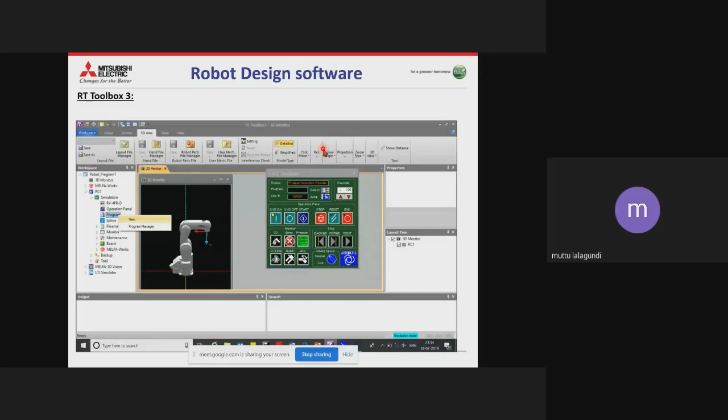Okay, so this is it. The software looks like this. In the next session we will discuss this software. Okay, so this is all about the robotics.